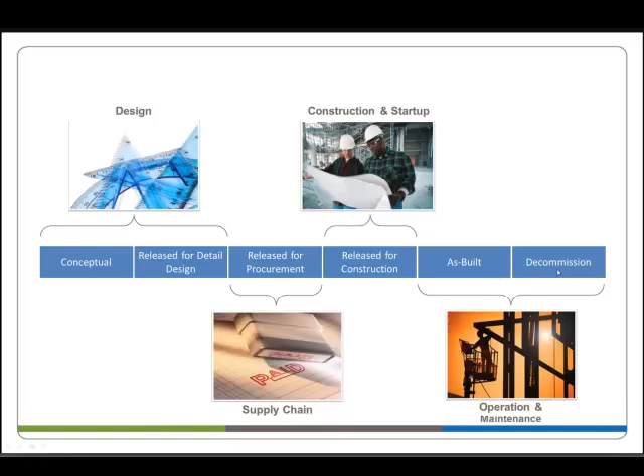From conceptual design all the way through the project execution, which is a release for detailed design, release for procurement, release for construction, into an as-built phase for operations and maintenance, also for any rework, as-built, retrofitting, etc., and then into eventual decommissioning. One of the main challenges that we have faced is, and I'm going to evangelize here for a minute, and I will evangelize during the keynote as well.

This is around how that information is managed through the project execution and that critical issue of handover to the facility. Here's one of the things that we discovered in our processes.

A tag around an asset, a design functional tag as it relates to an asset that will reside at the facility, is managed in the project execution as a design functional tag. That design functional tag is married to a physical asset, a serialized, specific make, model number, serial number of an asset that will reside as that design functional tag at the site.

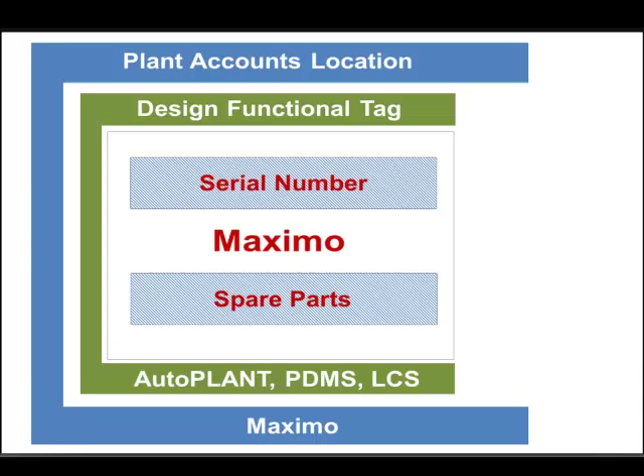What we know is that when it's at the site, it will actually be managed as a plant location in a work maintenance system. For us, that work maintenance system is Maximo. The physical aspects of the asset, the actual asset itself as it relates to the functional tag and the plant accounts location, is the serialized number and the spare parts. We also know that the plant's account location is a very complicated structure that has many layers.

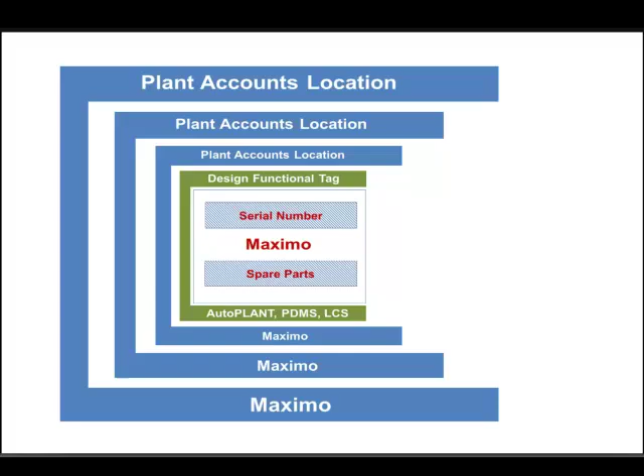Now, this is where I evangelize to especially those in the project execution phase who are not familiar with these plant accounts locations. The design functional tag is usually enough to carry the asset through the project execution.

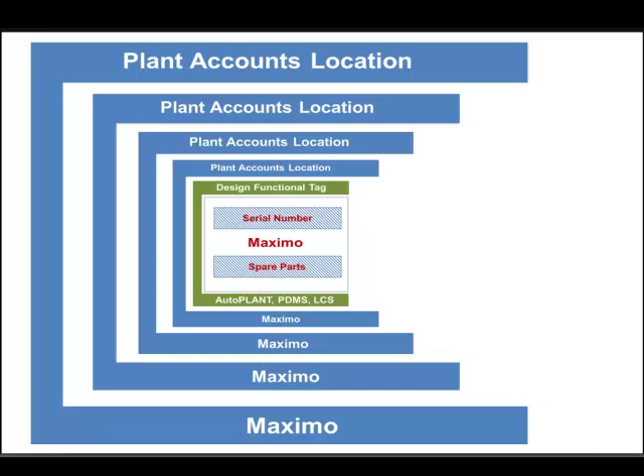And here's the challenge. Through the project execution, I want to point out too that the actual structure of these, number one, the accounts, and also the typical structure of a design functional location here at Southern Company, I've seen similar functional locations at other facilities with other companies, and this model should pretty much fit. But I wanted to translate those into real looking account numbers, real looking design functional tags.

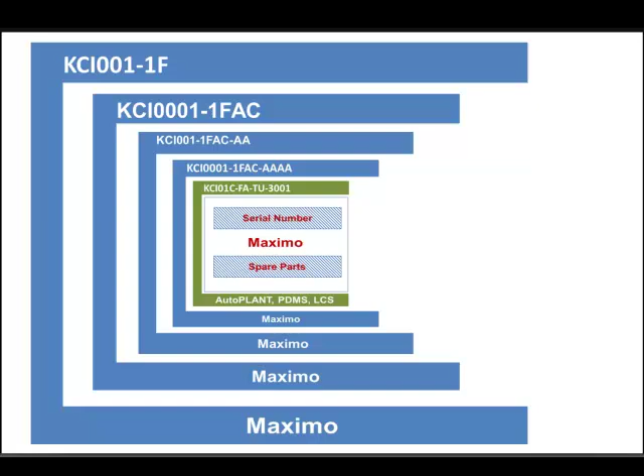The challenge through the project execution is to marry, through some sort of materials management solution, that's what we call it internally, through this materials management solution, the design functional tags that we see on drawings and on equipment lists with the actual serialized asset that will reside at that location, at the facility.

That's the challenge to the project execution, but also the challenge to the project execution is facilitating the marrying of that design functional location to the actual hierarchical plant location that will reside in the work management system.

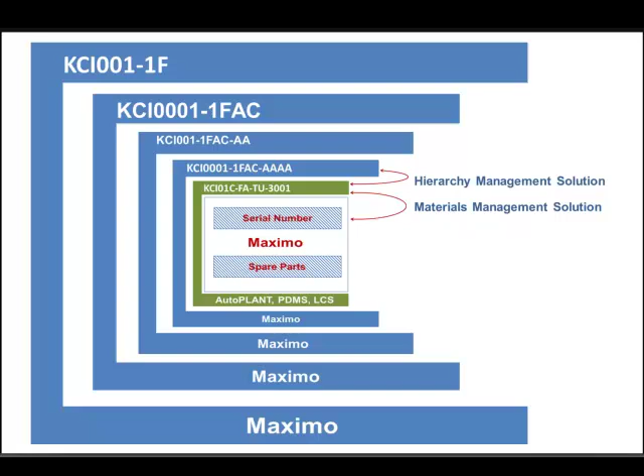And if you can do that, the wealth of information that is available immediately at handover, any related equipment, all documentation as it relates to that location and that physical asset, turnover code information, system startup information, manufacturing information, engineering data, work breakdown structures - a plethora of information if you can successfully manage the serialized asset to the design functional location.

And then the design functional location to the plant location, the handover of the Holy Grail, all of this valuable information that's required for plant operations.

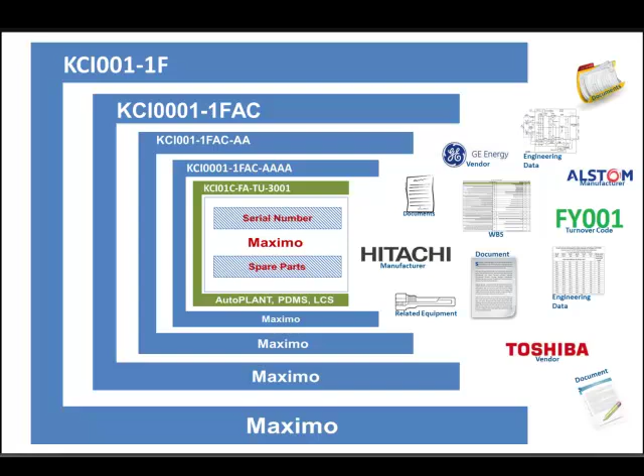What I'm proud to say is that at Southern Company, we've done tremendous due diligence around this process and have a system and a set of work processes that allow us to do this through the project execution and to hand over information to the facility, to the system owners, as it relates to the hierarchical work maintenance system at the site, on site.

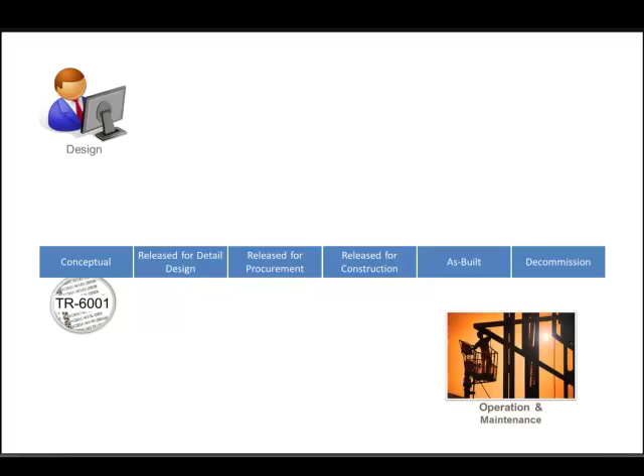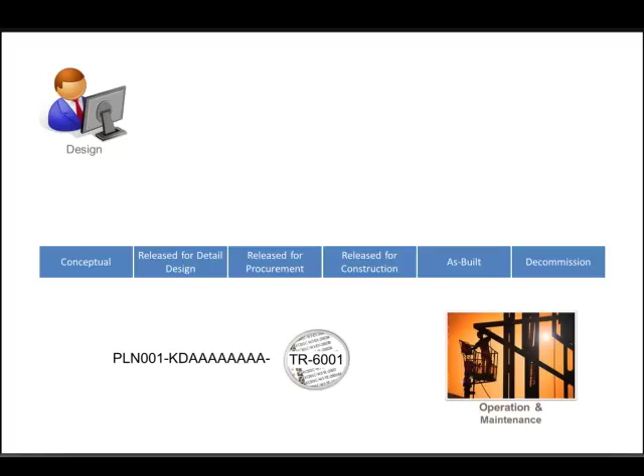So, in a nutshell, what I'll talk about is our process for taking this design functional location, how we work with the system owners on site through the project execution to build and maintain the plant hierarchy as it resides in the work maintenance system, and marry that design functional asset with all of its information, including the serialized information where available. There's still some gaps to cover with the hierarchy well before handover to operations and maintenance, so that the provisioning of the work maintenance system is done well in advance of the handover.

In my experience, a lot of the times the technology piece is the easier piece. It's the people and the process that require the most amount of work. And it is my belief through my work here at Southern Company that the actual focus on process aligns the people and the technology. So the focus I've had, predominantly the work I've done outside of the nuts and bolts turning of and configuring a system, has been around the process.

What does the process involve? And where do the gaps shake out when you look at your current process compared to what your ideal business state is? And how do you really plug those gaps? I plan on speaking in great detail, giving a lot of lessons learned around my experience working with process, people, and technology, and deploying technology for tremendous return on investment within our organization.

And I also plan to quantify some of that return on investment for Southern Company, and how deployment of technology has allowed us to drive efficiencies through our business by managing our processes and helping our people follow a set of standards and procedures that drive that efficiency through an organization.